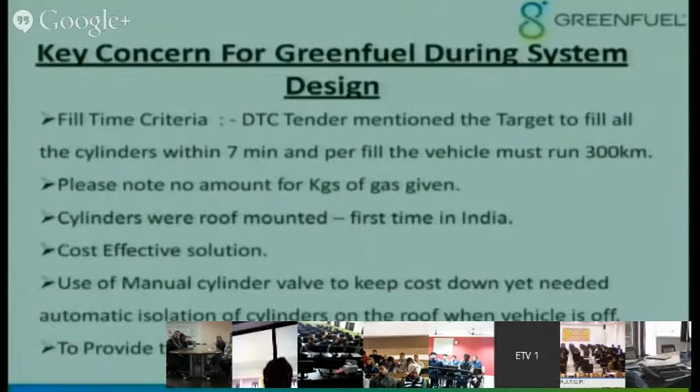When we started this project for low floor buses for Delhi Transport Corporation in collaboration with Tata Motors, something very important was given there: they wanted to fill gas in all cylinders within 7 minutes, but the amount of gas must enable the vehicle to run 300 kilometers. Please understand, they did not say how many kilograms of gas, only that cylinders should be filled within 7 minutes and the vehicle should run 300 kilometers. So it was the first time in the history of this country where a requirement of mass flow rate of filling gas was required.

Cylinders were on the roof. In many cases, cylinders are mounted on the chassis. As usual, they wanted a cost-effective solution. Because cylinders were mounted on the roof, you require the cylinders to be isolated for safety reasons. I will discuss more of that in detail. But due to cost, we couldn't use automatic isolation for each individual cylinder. Yet we had to do a complete safety system for the vehicle.

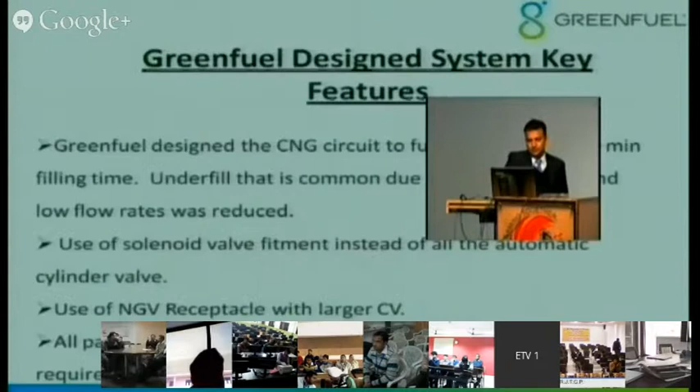As with any system, you must conform to certain standards. In natural gas systems, the key standards are ISO 15500 and ECE R110. ECE R110 is a United Nations regulation, and ISO 15500 is an International Standards Organization standard.

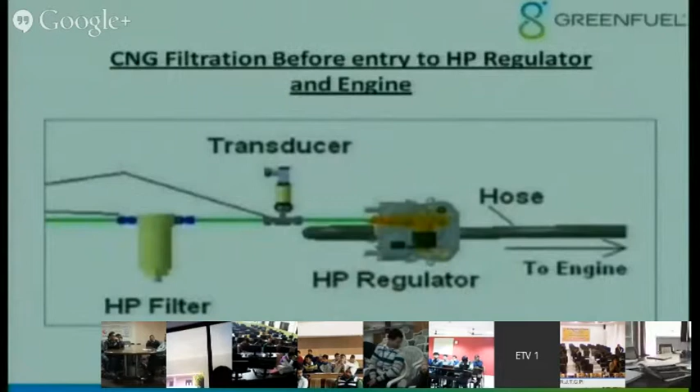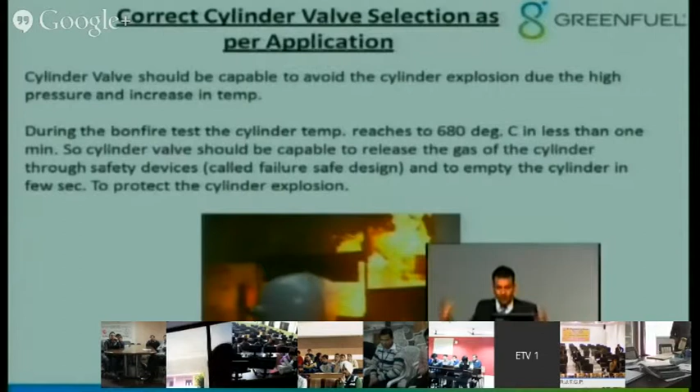A bonfire test is mandatorily done for all the cylinders. Bonfire test means if there's a fire in the vehicle, the cylinder should not explode. Why? I already discussed the temperature-pressure relationship - as temperature rises, pressure rises very quickly in the cylinder. If that gas remains contained in the cylinder, the ultimate tensile strength of the steel keeps coming down. Because of temperature rise, your steel strength will start coming down, and these are steel cylinders, type 1. And if the gas remains contained in the cylinder, its pressure will rise very rapidly. Just to give you an idea, when this test is done, the cylinder reaches 680 degrees in less than 1 minute. That is the kind of rapid rise of temperature.

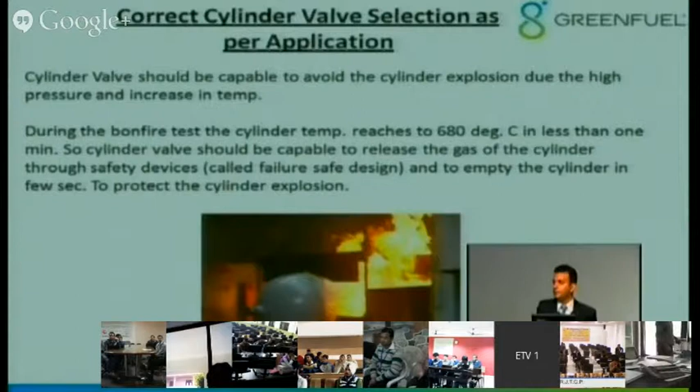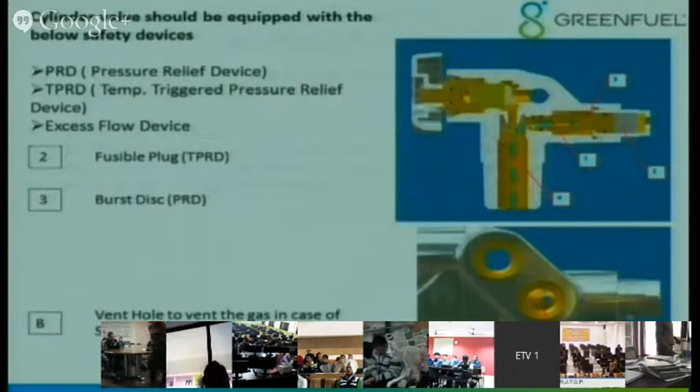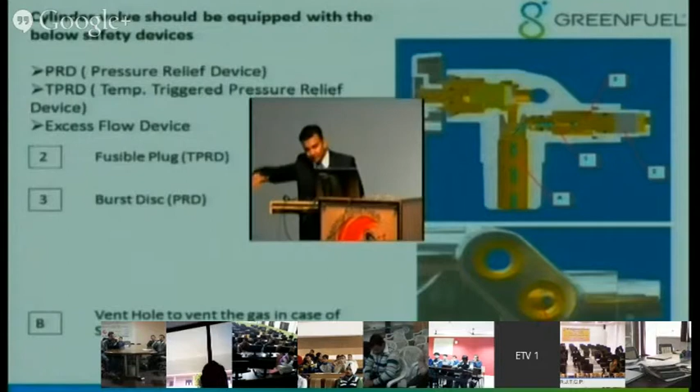So any system that we use on the cylinder, we have to ensure that it will empty out the gas before the pressure rises to a level where the steel tank reaches its ultimate tensile strength and therefore may burst and explode, causing loss of life and death.

A very important thing we install in cylinder valves is called safety devices. These safety devices are of two types: a fusible plug and a burst disc. Fusible plug is activated based on temperature, and burst disc is activated based on pressure. So there are two safety devices - one that is pressure-triggered and another that is temperature-triggered.

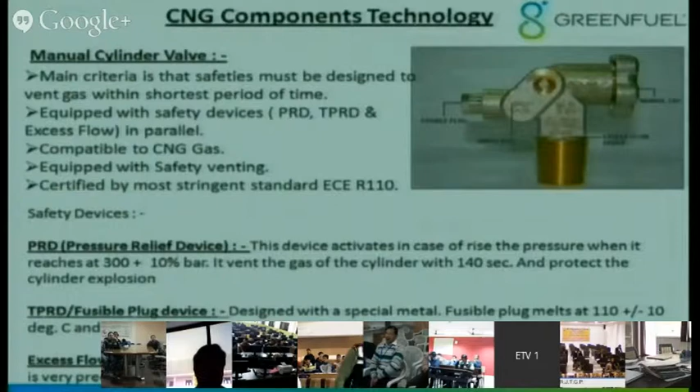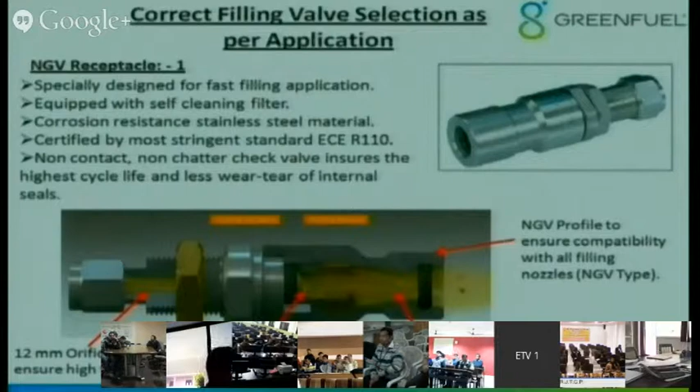I was talking about the filling valve. This is also a very important thing. Whenever we design a system, we must look at the CV value. CV value means flow coefficient, coefficient of flow. It does not have any unit - CV does not have any unit, you just define it. The CV of your entire system must be as close to the value of the largest orifice CV, because if your CV anywhere is lower, then you will get a choking point.

When you get a choking point, the Joule-Thomson effect will take place and you will get rapid cooling of gas, and you can identify a choking point from looking at outside also. Wherever you see more icing outside, that is a choking point, because if you work out the Joule-Thomson effect, it states that whenever there is a rapid expansion, there is rapid cooling, and that cooling you can see on the outside.

So your CV of the entire system must be as close to the highest component CV as possible. That's why selection of components and design of system are very key and important features in designing an entire system. It is not just that you take one component and another and put it together, your storage system will fail. I have limited time, so I've given you about 20% background on how a filling and storage system for a natural gas vehicle must be designed, through a case study.

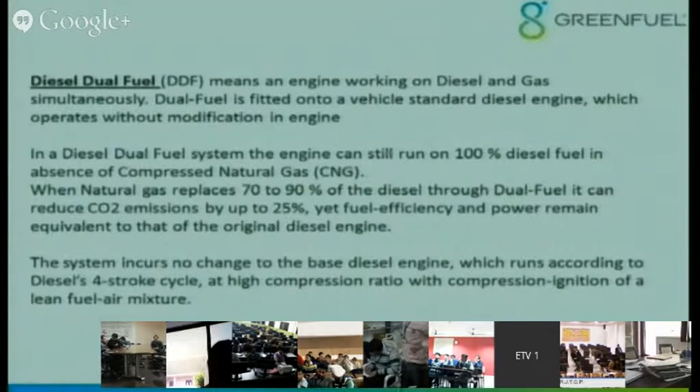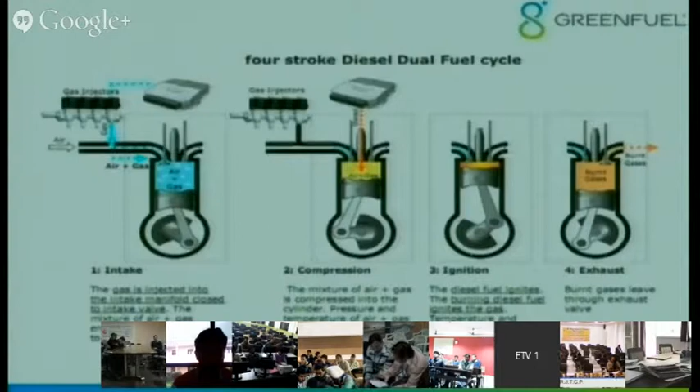There are mixer systems also you can use, but that is a different technology. Here we are using injectors, and in the intake stroke we are putting an air and gas mixture. When the compression stroke happens, you are injecting a very nominal amount of diesel. That diesel ignites and it burns the air and gas mixture. That is how the stroke happens in this system.

And because of that, you are substituting a large amount of diesel with gas. Here you are not changing the design of pistons, cylinders, etc. This is all taken care of by the intelligent controller, and the gas system is put in parallel. This is very different from a monofuel system.

The three types of systems that exist: I spoke about bifuel, I spoke about dual fuel - this is a dual fuel. And one is monofuel, meaning one type of fuel. The design criteria for all three are different, and the controllers are different.

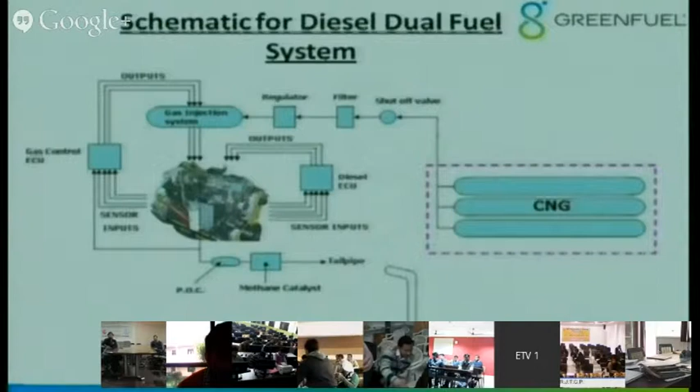Let me very quickly come to this schematic. If anybody is interested, we can mail you this. I don't want to get into details, but it is nothing but a normal CNG system, with certain extra inputs which we need from the diesel ECU. And therefore we are able to create a dual fuel system.

I believe this system has tremendous potential, especially in those markets where there is a very high price for diesel and they are power starved - okay, in industry, and I'll explain. First of all, you're not losing power, etc.

So let's say big generators at remote locations like oil rigs or mining, where they have gas availability - if we can substitute those generators to run on gas, they will have a lower cost, plus they will save a big problem, which is transportation of diesel to that place.

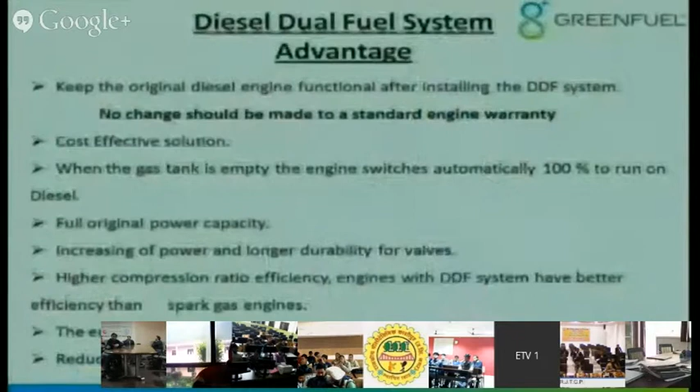They have better efficiency than spark gas engines in a diesel dual fuel system. Reduction, of course, in NOx emissions and so on.

Now, very quickly, I'll come to a monofuel system, and a very challenging monofuel system. Monofuel means, you know, the auto rickshaws in Delhi have to run on natural gas, and in Bombay, Pune and Hyderabad, they're all running on natural gas.

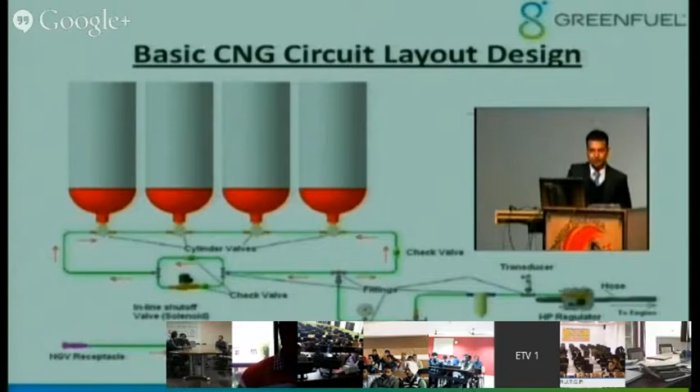You don't need a rail, automatic cutoff, filter, no hose needed, sensor - everything mounted in one body. It is called a modular system. We have reduced the footprint.

We have reduced it because in a single cylinder system you don't need that much gas. By getting the regulator closer to the injector, we have increased the response, because this is a mechanical system - if you have a hose in between, there will be lag and some starvation. Because of that we have called this the injector reducer.

So instead of using 4 different components, it's all in one, and because of that, on the hardware side, we have been able to reduce the cost by 40%.

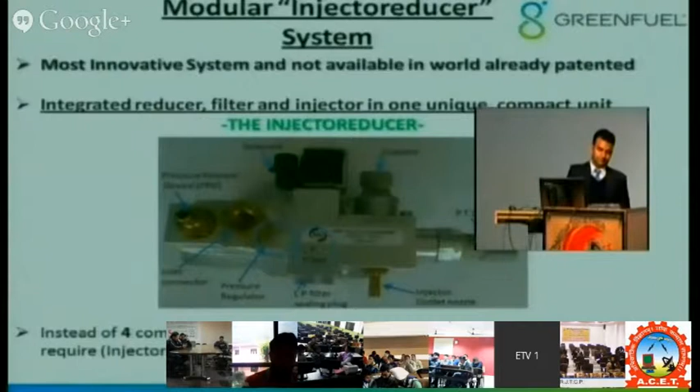We are the only company in this country and in the world to have this system. It offers many advantages.

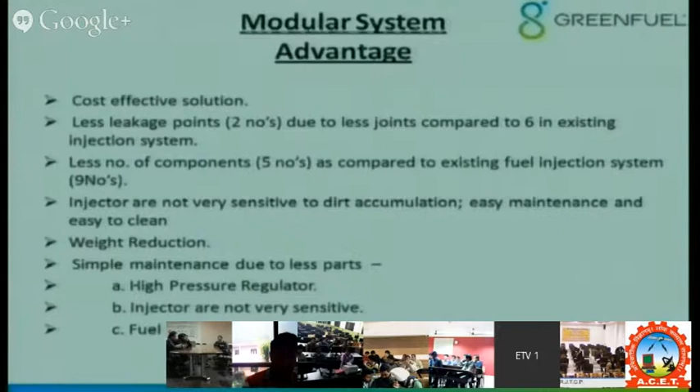When you have a CNG system, gas system, you want to reduce the number of joints. Why? Because otherwise they can leak, which is a safety concern.

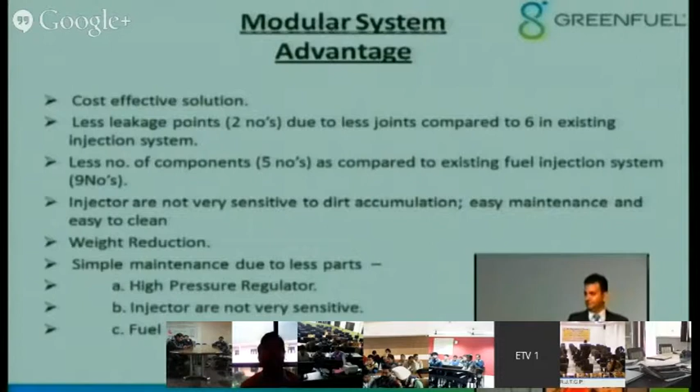You want to have an easily maintainable system. If you have too many parts, you have to maintain too many parts in the vehicle. Fewer parts means less maintenance. Many parts like fuel rail etc. are not required.

Then came the next big challenge, and this was a really big challenge, and we are still working on the next phase of improvement of making our own ECU. It will be designed and developed entirely in India.

Earlier on, all these ECUs come either from Italy or a company like Bosch or Denso. Bosch and Denso etc. are very expensive, as I'm sure everybody knows. We are making our own ECU for this market, the next development, and we already have an existing ECU.

We were able to design a new PCB board, a new layout to cut out all the non-essential functions. I'll give you an idea: for example, cooling fan, we don't need that, or an AC output input, you don't need.

This kind of development, if you do anywhere abroad, they'll charge you crores and crores of rupees. For us, it costs 40 lakhs.

Because of this, today we have the most innovative system, and the only system. To give you an idea, we are able to sell this system within 10,000 rupees, which was earlier costing 25,000 rupees. Not only have we designed a system, we've already tested it out, and we have some targets: it can give 12% better fuel efficiency compared to the existing carbureted system in a three-wheeler.

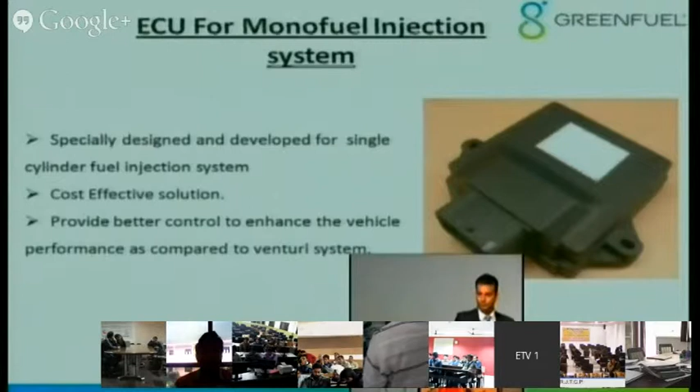So we have met the cost targets, we can provide better fuel efficiency, and we have a system which is much simpler. This is the first principle I learned in my design class in engineering.

Keep it simple, silly. We all try and reach a solution through complicated means. My only advice to every person is, please try and reach the simplest way.

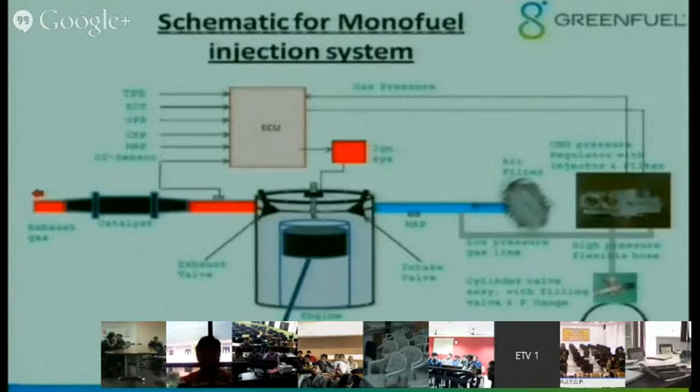This is just a thought, and I encourage you students, we maybe can get together with some departments. This is something I want to do. Every village, big village has biogas, or they generate waste, home waste.

If we put that home waste into a biogas fermenter, and then attach a small CBG, compressed biogas plant. What does the CBG plant do? It scrubs the methane, because biogas has low methane content, 65 to 70%. We scrub it and take it to 90%.

Now, like natural gas, you compress it and dispense it. And here, let us convert a tractor into dual fuel. It can run on diesel also and on gas also, and substitution also.

So during the day you run it as a tractor, and at night let's use it as a generator by putting a little inverter. This is a project that can be very helpful in villages where they are using high amounts of kerosene.